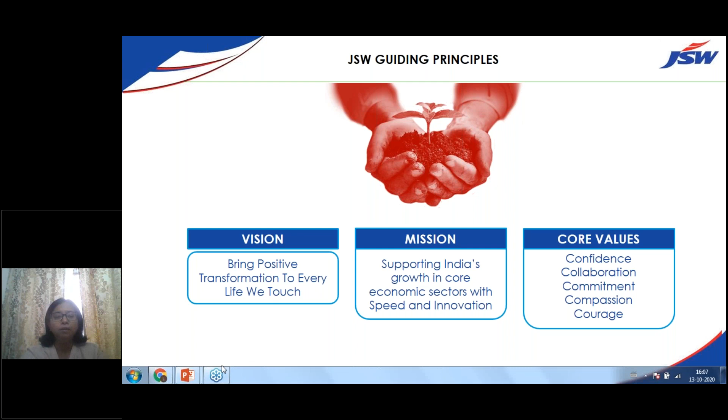I will start with the basic JSW guiding principle - the vision, the mission, and the core values. I would like to draw your attention to bring positive transformation to every life we touch. Mission is supporting India's growth in core economic sectors. Core values are confidence, collaboration, commitment, and the other values you can see here. This is something we very much believe upon - our organization is there to bring the best of products and best of services to people.

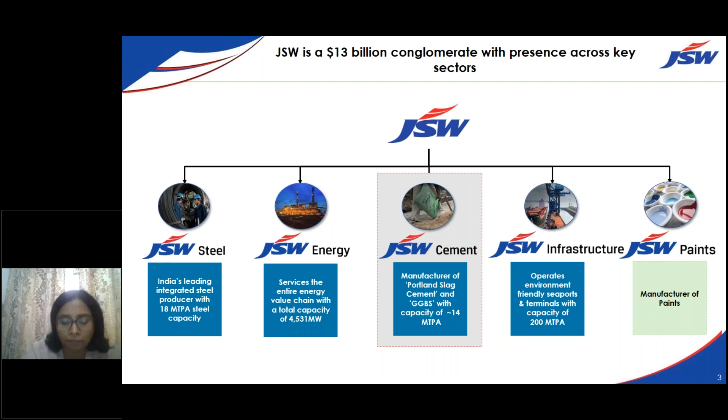JSW organization as a whole is a $13 billion conglomerate with presence across steel - we have 18 million ton capacity, which is going to be further augmented. JSW Energy, we are the third largest player in energy. JSW Cement, we are a young company but with a lot of ambition and plan to grow - 14 million ton is our capacity, and we want to grow up to 30 million ton in the upcoming years. We also have infrastructure like ports and terminals, and JSW Paints factories in Vasind and Vijayanagar.

This is the group's contribution towards India's progress - a lot of education, vocational training courses, and the Olympics - athletes are trained by our organization. If you go to our Vijayanagar Inspire Institute of Sports, you can see boxing, judo, and track training. Sakshi Malik, etc., have been developed under our Inspire Institute of Sport. Metro Rail, developing India - we are doing a lot of work there, laying down new pipelines.

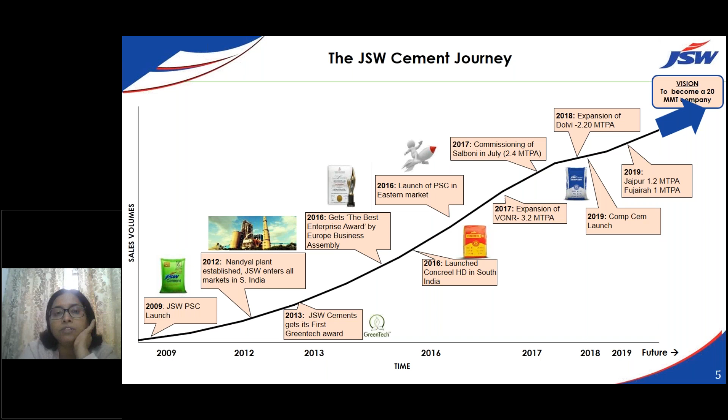The company started in 2009 with the introduction of JSW PSC. Then in 2012, our Nandyal plant was established and we got our first Green Tech Award - the product was green. Then in 2016 we got the Best Business Enterprise Award, and in 2016 we also launched our premium product Concreel HD in South India.

Then we went into PSC cement launching in the eastern part of India. We started Salboni, expanded Vijayanagar and Dolvi, and then went into Jajpur, and progressively set up one unit in Fujairah. Now today we have also acquired a unit of Shiva Cement, where we are going to very shortly put up a clinkerization unit. So this is the journey we are sharing with you.

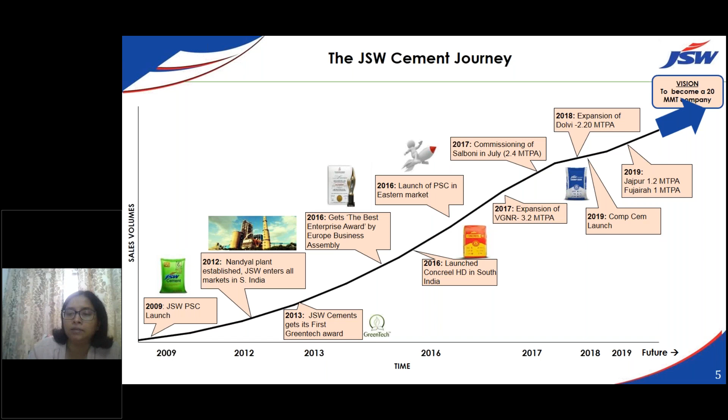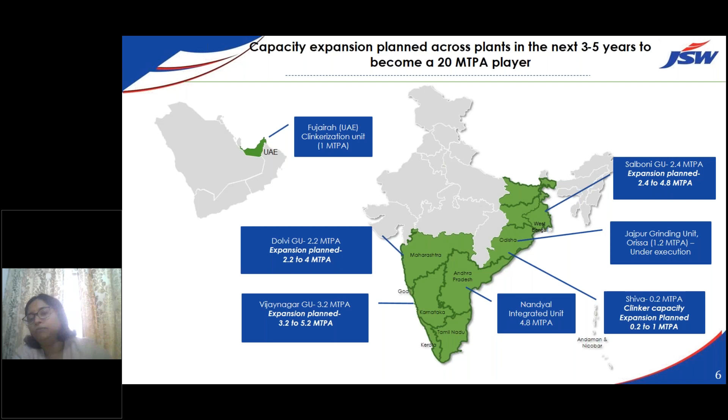With respect to the units, you can see the Dolvi unit - this is 2.2 to 4 million tons, which has been done. Dolvi is under expansion, Vijayanagar is at 3.2 million tons and we want to take it up to 5.2 million tons. Nandyal is an integrated unit of 4.8 million tons, and we have one unit in Jajpur, another in Salboni, and in Fujairah we have put up a clinkerization unit.

So we are going to cover the topic of PSC and GGBS and their role in sustainable construction.

So India's first green cement. We are the first company in India to get our product eco-labeled by CII IGBC. Both our PSC, Portland Slag Cement, and ground granulated blast furnace slag are CII IGBC certified green products, and this is applicable for all our plants.

Other than that, we also have the Environment Product Declaration. This is actually very good for us to tell you, because we competed amongst many top cement manufacturers, and it was found that our carbon dioxide emission percentage was the least in the industry. We have got this EPD declaration for both Portland Slag Cement and GGBS today. I'm very proud to say only a few companies in India have both this Environment Product Declaration, which is in line with ISO and EN standards, for both PSC and GGBS, and CII IGBC certified green product.

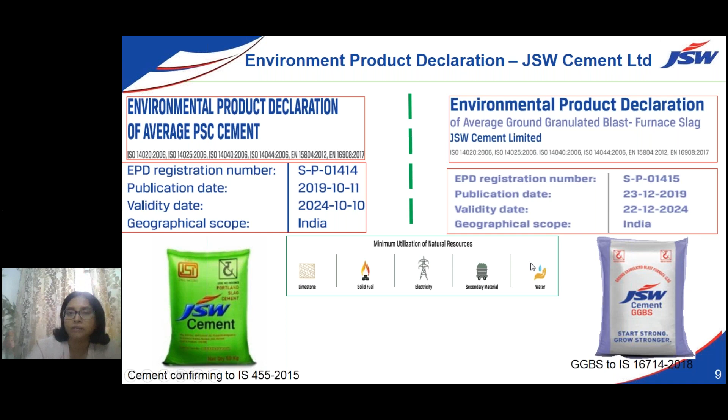So what are the products of JSW Cement which are compliant to CII IGBC Green Pro certification? Portland Slag Cement conforming to IS 455 - this is the mother brand. We also have ground granulated blast furnace slag conforming to IS 16714-2018. We are showing you these two products because these are the main two products, along with some OPC. These are the main baseline products for the institutional and non-trade market sales.

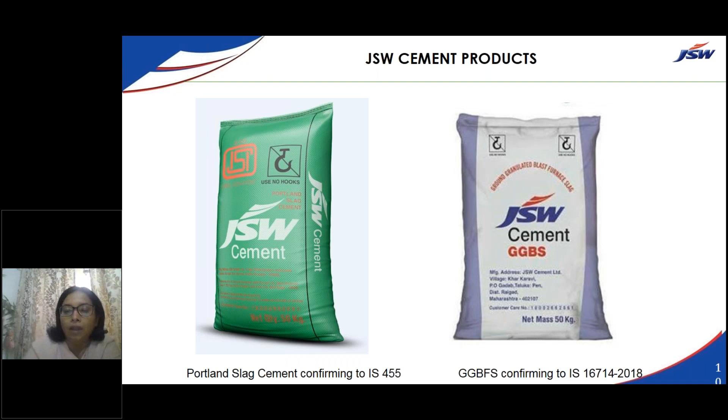If somebody is interested in trade products, we have other product variants like Concreel HD, which is also a Portland Slag Cement, but for people who want immediate quick deshuttering, they can use that product with high strength. We also have composite cement, which is IS 16415 compliant. Along with that, we have raw slag, which can be used as a replacement of sand - 25% to 50% replacement can be done for the coarse and fine aggregate part.

So we will explain what this blast furnace slag is. Blast furnace slag is basically silicates and aluminosilicates of lime, which are developed simultaneously with iron in the blast furnace. The slag which comes out of the blast furnace is rapidly quenched in water, and then it is ground in a vertical roller mill or roller press to a very, very fine powder, which is called GGBS.

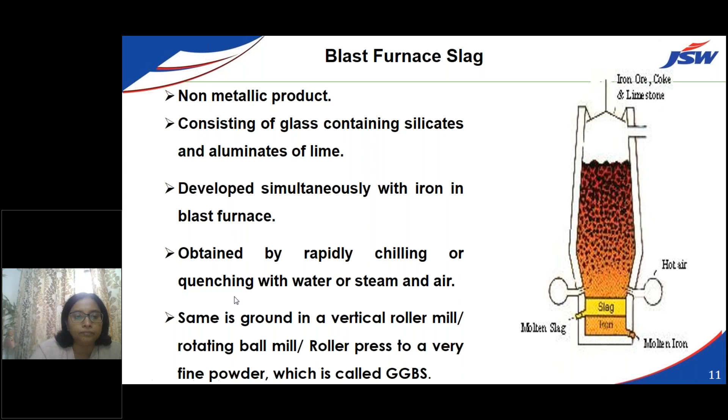So then I will go to the next slide - what is the chemical composition of GGBS? I would like to tell you. The GGBS composition has a unique composition - it has a lot of calcium oxide, which you won't see in other products. If you compare fly ash to GGBS, the calcium oxide content in GGBS goes beyond 30 up to 40%. The glass content is also 97.5%, a very fine glass content.

With the help of this glass content, the product we will be making will be very reactive, and the particles of slag will be so good. It is not only going to give you strength from the calcium oxide - the lime content is at 30 to 40% - but it will also give you the durability you require, and it will also give added benefit to the workability of the mix, etc.

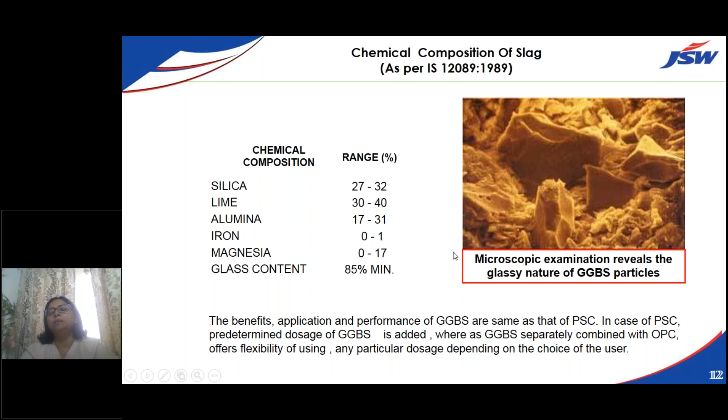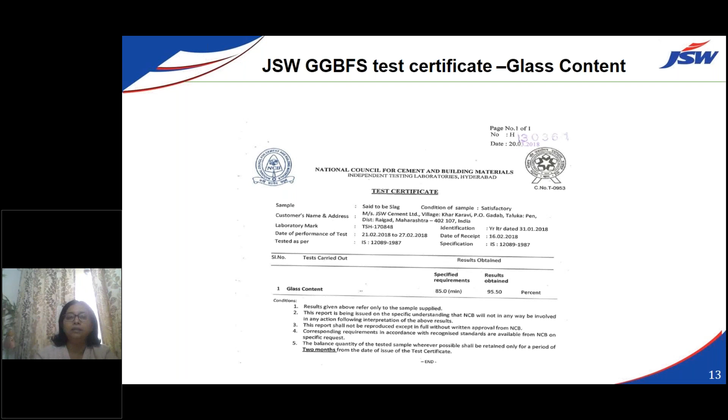So we are showing you some microscopic examination of the glassy nature of GGBS particles. We are enclosing some test certificates - you can see here our glass content goes up to 97%. In many cases, the test certificate done at NCCBM shows 95.5% glass content.

So I was talking about comparison of cement clinker, PSC, GGBS and fly ash. If you see, cement clinker has 62% calcium oxide. In GGBS, it is approximately 40%. But in fly ash, it is very less - approximately 2%. It is very much evident from the mineralogical constitution analysis that the hydraulic properties of slag are equal to that of clinker. So basically, the slag which is ground into GGBS is as good as clinker.

The lime which is used to charge the blast furnace is coming out in the form of slag. So silicon dioxide is present in all of it. It is also present in GGBS, and it is also present in fly ash.

Now, if we see fly ash, what happens in the case of fly ash? Fly ash is collected from different pockets. Different places will have different fly ashes. People are getting very environment conscious, and it is extremely difficult to get good quality fly ash also.

So now the slag which is coming, this is coming from a controlled source, and the manufacturing is also controlled. Hence the slag which is coming is a product of controlled production. The parameters which we'll have will be as good as cement, if not, or cementitious product, if not equally better.

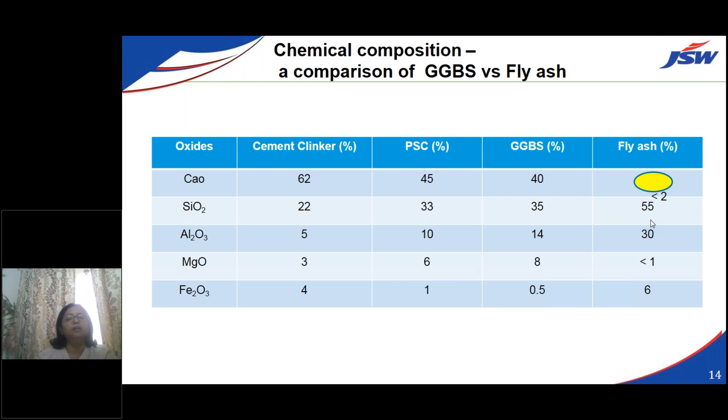That's the reason if you see the IS codes are permitting replacement of slag up to 70%. If you see EN, British codes or European codes, the slag goes up to 90% also, in places where there is a lot of marine environment, cold weather is also there.

But however, even in EN and also in IS, the slag replacement percentage, though it is very, very much on the higher side, the fly ash can go up to maximum 35% because of the different sources fly ash is coming from. We don't know whether it is dry, and it is just mixed like that. Very few manufacturers are processing fly ash. In fact, nobody is processing and adding fly ash.

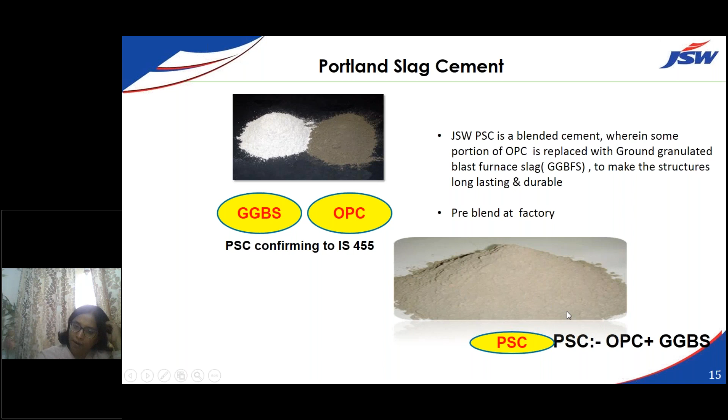So this is the difference. Wanted to show you the GGBS, the powder which is there, the whitish colored powder which is mixed with OPC to make an inter blend of Portland slag cement, which is OPC plus GGBS. It is pre-blended at the factory.

So we are showing you the slag powder, which is conforming to IS 16714. This is used as a partial replacement to OPC cement in concrete production in RMC batching plants and site batching plants. So this is something which we have already shared, I will not repeat this.

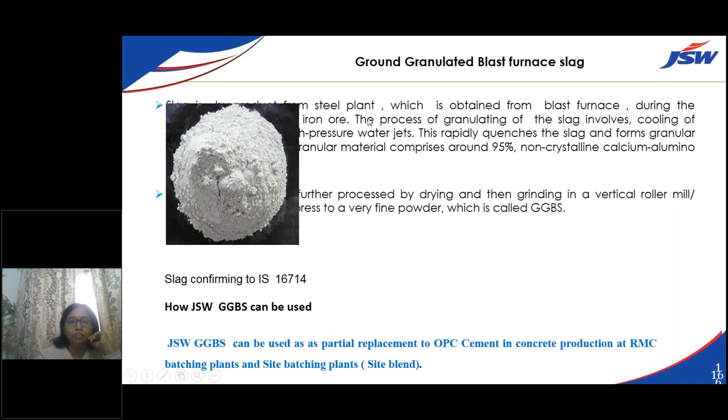So what are the hydration mechanisms which are happening? So when OPC is mixed with water, there is a calcium silicate hydrate gel which is formed, and calcium hydroxide is also formed, which is a byproduct.

So this calcium hydroxide, normally what it does, it goes and occupies the space which is very near to the aggregates, because those spaces are spaces where there are a lot of pores and voids. The water which is there inside slowly gets evaporated, and the water interacts with the cement, and the calcium hydroxide goes and takes those places.

So this calcium hydroxide, supposing a concrete which is having a lot of calcium hydroxide, you'll see white particles have come and the lime has leached out. What happens? Where the lime has leached out, pores and voids will be formed, and through those pores and voids, the particles of the environmental agents are going to go inside. They are going to sit on the reinforcement rod or corrode the reinforcement rod, and there will be a lot of complication in the concrete structure.

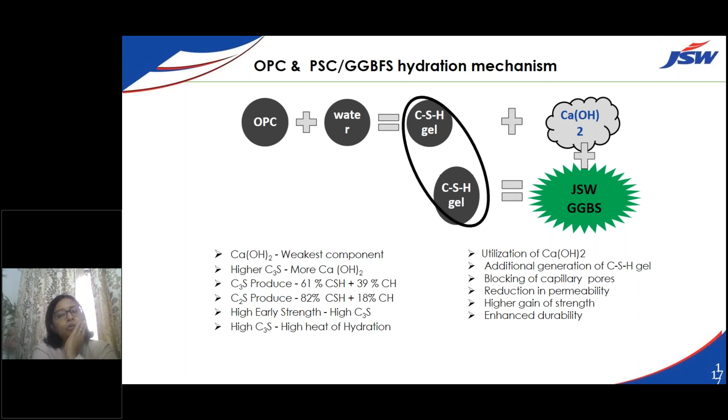It will be distressed. So in order to finish this calcium hydroxide, what has happened? We are adding slag. So slag reacts with calcium hydroxide to form another layer of calcium silicate hydrate gel, or tobermorite gel. This gel is very good, and it is going to utilize all the calcium hydroxide in the system. It blocks all the capillary pores, it reduces permeability. With reduction of permeability, there is also a high gain of strength, and the durability of the structure obviously increases.

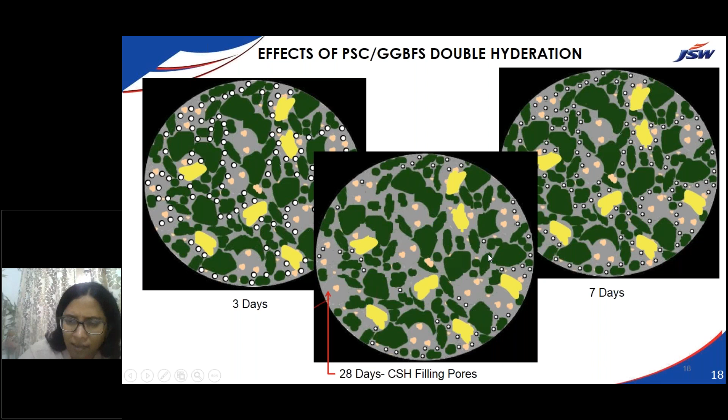So we will like to just show you the pores and gel. When you are using at 28 days, you can see here the pores and gel - in 3 days they were very big, but with the hydration products of the slag coming in, the pores and gels become smaller, and the durability of the structure increases while the permeability of the structure reduces.

We will talk about sustainable development. Sustainable development is concrete compressive strength. So now people will be telling us about the concrete compressive strength. So if we are comparing a PSC cement or an OPC cement, if you can see the strength here, or OPC GGBS 40%, OPC fly ash, you can see the long-term strength. The short-term strength will be almost similar, that's 28-day strength.

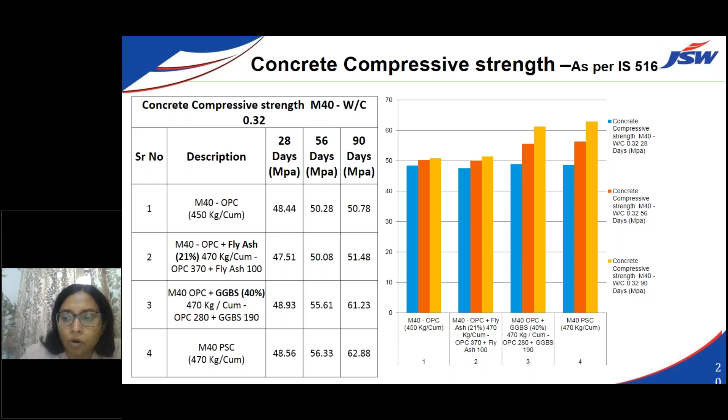The best part about slag is that the long-term strength of slag products gives you higher compressive strength compared to fly ash based or OPC based concrete. This is the compressive strength.

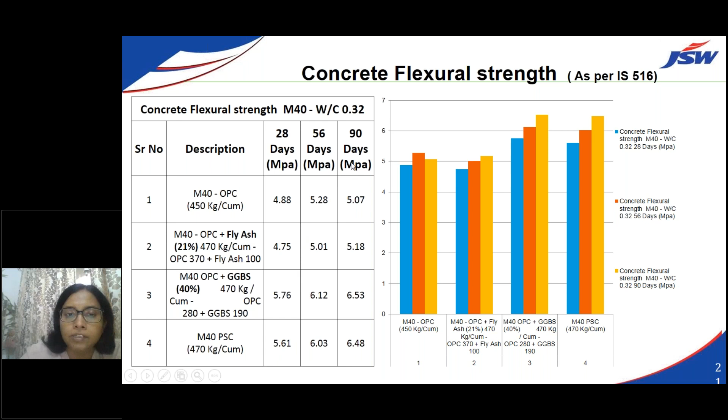Now we move on to flexural strength. Here you can see the flexural strength of M40 OPC and M40 PSC. The flexural strength is also improved here, and it is in line with OPC, if not better.

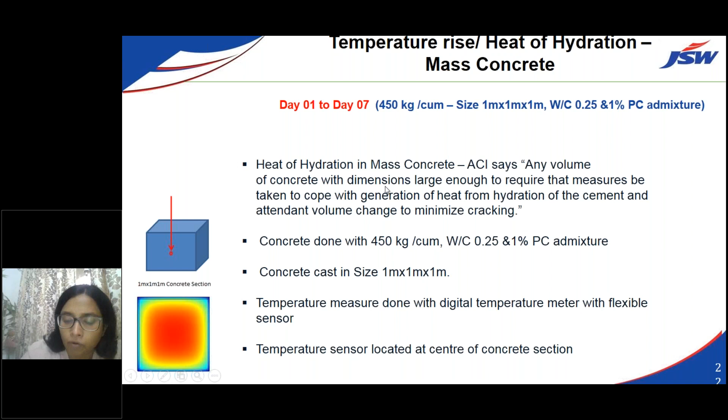The heat of hydration - I'll briefly cover the principles in general and share the detailed presentation separately. The heat of hydration of slag products is very good, comparatively much less compared to products made with purely OPC. So we have done some heat of hydration tests at NCCBM.

Cement has given a heat of hydration of 853 kilojoules per kg, whereas fly ash gives a heat of hydration of 663 kilojoules per kg. Slag products give a heat of hydration of 228 kilojoules per kg with 50% replacement.

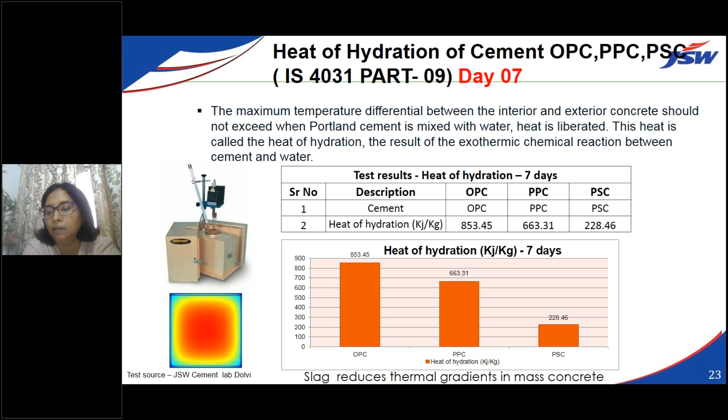So you can see the thermal gradients of the mass concrete are reduced. The temperature of the concrete goes down, and there will be very little cracking in the concrete structure. Again, going back to the same point, the durability of the structure will be improved. The exothermic chemical reaction, when water is added to cement, releases a lot of heat - this can be controlled with slag products.

This is a very important parameter, a new one that has come in and is very much prevalent. There is a trans-harbor link being built on the Arabian Sea, about 30 kilometers long, going inside the sea and connecting different parts of Mumbai. We are showing you a photo of this trans-harbor link.

The contractors are L&T and Tata Projects, and they have done so many trials - each must have done more than 100 trials, with OPC, OPC fly ash, OPC slag, OPC GGBS, and OPC GGBS microsilica. After doing all of this, only the products of slag could meet requirements.

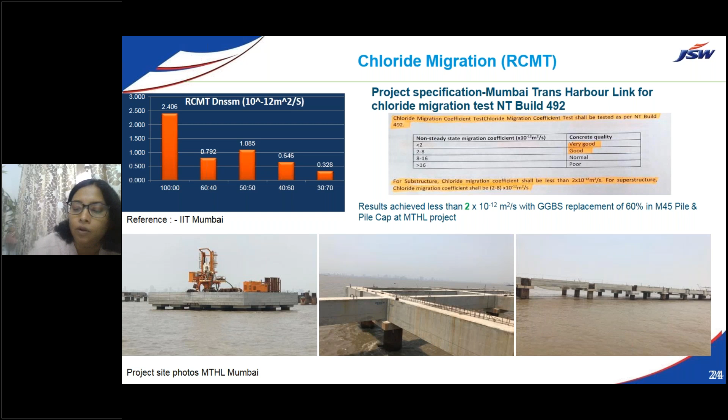The chloride migration coefficient test, as per NT Build 492, which should be less than 2, could only be achieved with GGBS. In this extremely aggressive environment, no other product could take care of this.

We move on to the rapid chloride permeability test. This is a very easy test, simple to do in laboratories. If we look at various replacement levels of GGBS - 0%, 25%, 40%, 50% - we see that normally with 50% replacement of GGBS, the rapid chloride penetration charges passed are very, very low, approximately 500 to 600.

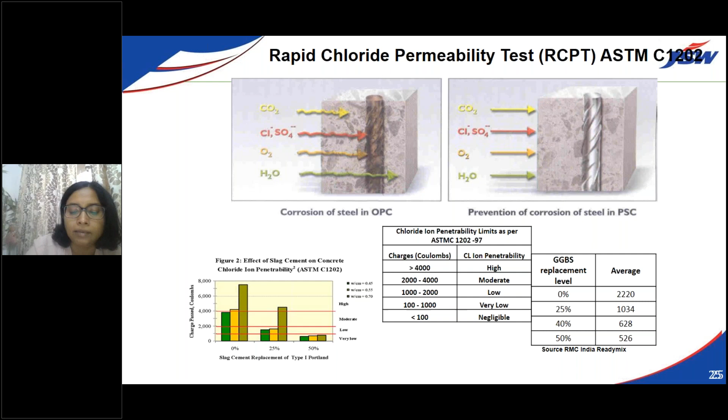If there is only OPC in the system, you can see it goes beyond 2000, sometimes up to 3000 to 4000. So the more slag we add, the readings become very low, and chloride ion penetrability reduces. The structure becomes such that external agents like chloride, sulfate, nitrate, etc. cannot infuse inside the concrete, and the structure behaves in an impermeable and strong manner.

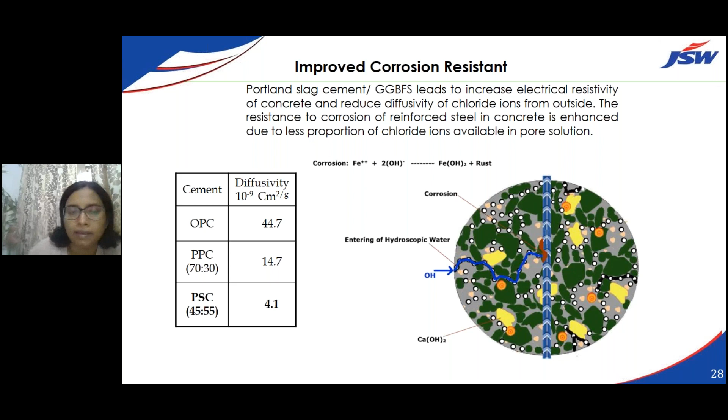Basically, there are a lot of pores, voids, and channels in the system, and when using OPC there is a linkage happening in this. When PPC cement is used, the diffusivity reduces to 14.7. However, there is a drastic drop in diffusivity if Portland slag cement is used, with a replacement level of 55% - the diffusivity level is 4.1 times 10 to the power minus 9 centimeters square per gram.

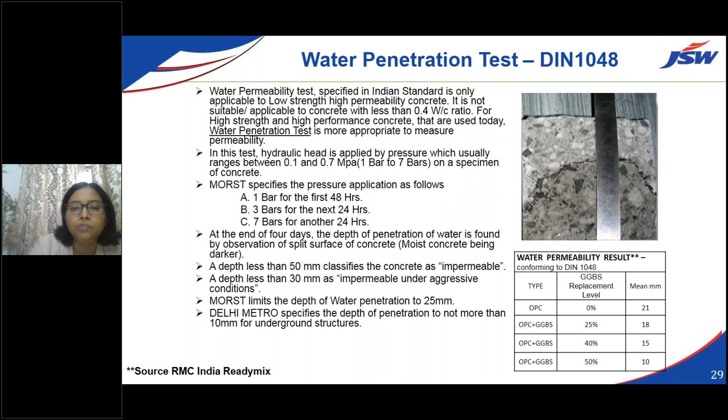A very important test - water penetration test or water permeability test. It should be less than 10. We are basically going into the main concept here: 50% OPC with GGBS plus OPC will give you a mean water penetration depth of less than 10, which is very good, as these are the conditions that metro authorities normally require for construction.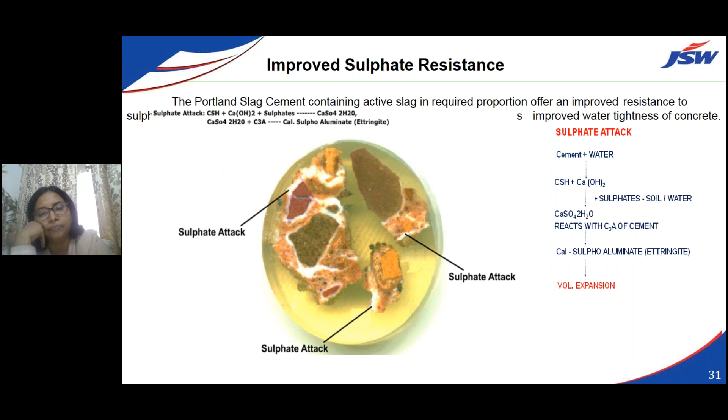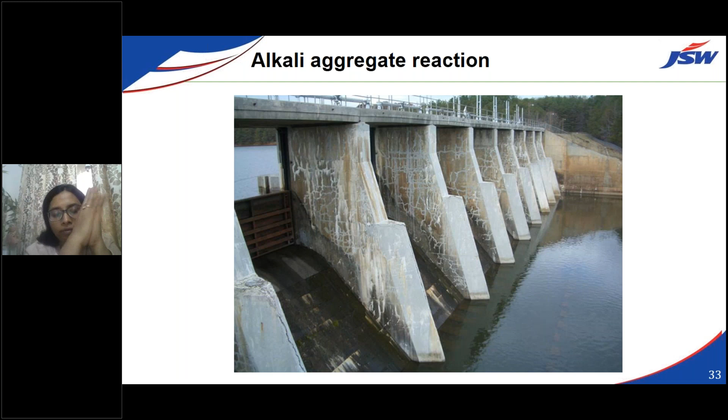Along with that, slag products take care of sulfate attack, improved sulfate resistance, and alkali aggregate attack. I'm not going into detail because these are topics in themselves, but the slag products have the ability to take care of the evil effects of sulfate attack and alkali aggregate reaction. You can refer to any textbook, P.K. Mehta and Monteiro, or Neville, but you can see the photos we have shown here.

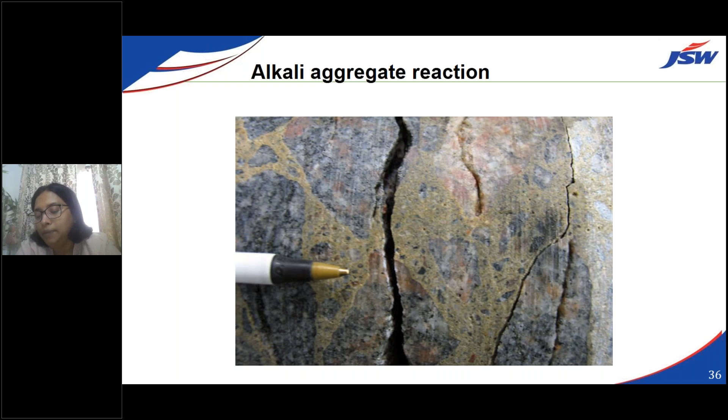Similarly, with sulfate, if sulfate soils enter the foundation or the concrete of a building by seepage or any other means, the products formed are going to be harmful, and we have to take care of this. That's the reason slag cement, GGBS and PSC based products, are preferred, as they reduce this reaction.

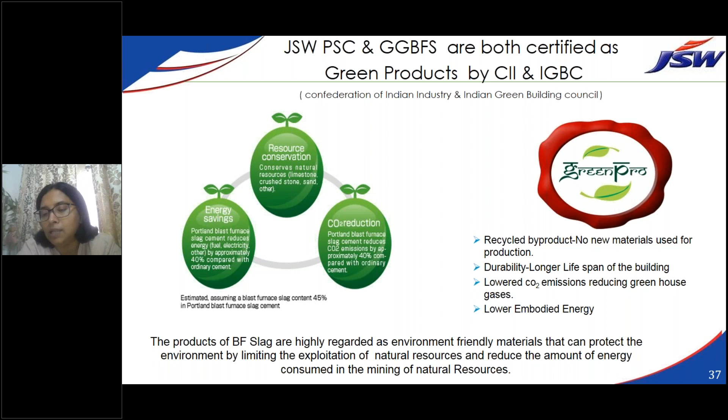On what basis has the green product certification been given? Resource conservation, because we are utilizing the industrial byproduct of calcium oxide, which conserves natural resources like limestone, crushed stone, and sand. Carbon dioxide reduction is there because we are not making as much clinker; we are utilizing the byproduct from steel manufacturing in our process. And energy saving, because we are using alternate energy such as fuel and electricity. So we are saving resources, saving the mother earth, which is why this is a very green product.

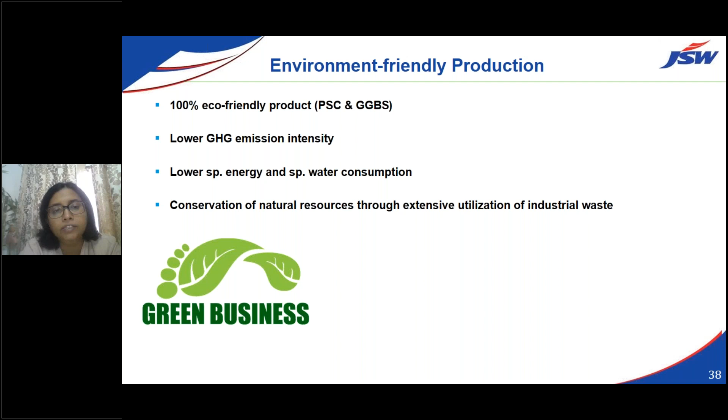So eco-friendly product, lower greenhouse gas emission, lower specific energy, lower specific water consumption, and conservation of natural resources are the key points we have.

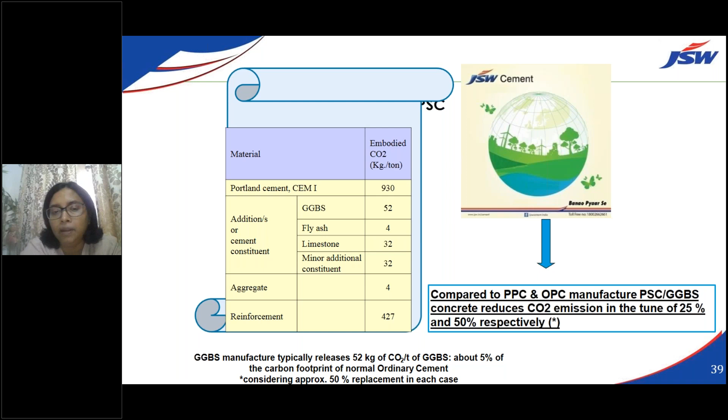Compared to PPC and OPC manufacturing, PSC and GGBS concrete reduces CO2 emission to the tune of 25% and 50% respectively. So if somebody is using PSC, they will have savings of 25%, and GGBS 25 to 50%, depending on the percentage of slag being added.

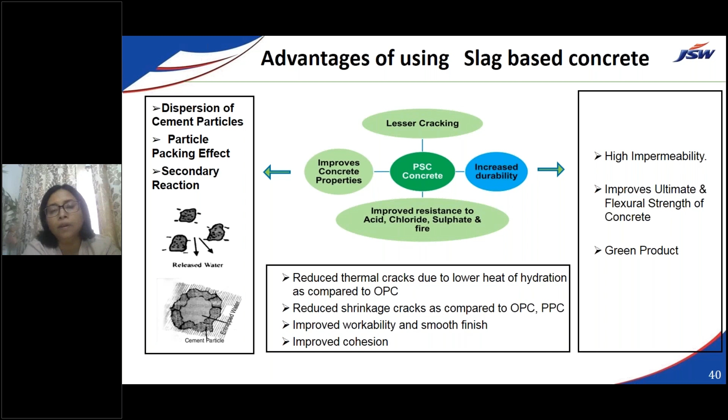Advantages of slag-based products we have already told you, I will just brief here: reduced thermal crack, reduced shrinkage, better workability, improved cohesion, less cracking, increased durability, improved resistance, and improvement of concrete properties. So Portland slag cement and GGBS concrete can be used in piles and pile foundations, and in any structure. Especially GGBS is meant for concrete work, but PSC as a cement can be used from pile foundation to plastering.

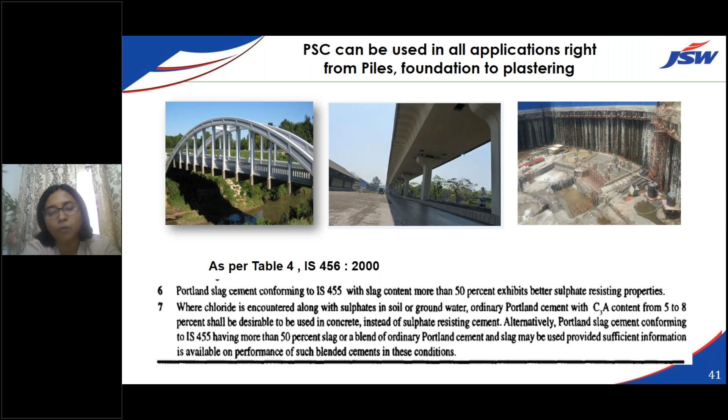Our PSC cement and GGBS are extensively used in Kolkata Metro work. So you can be rest assured that the products you are getting are not lesser than world standard, but in fact equal to any world-class manufacturing standard product.

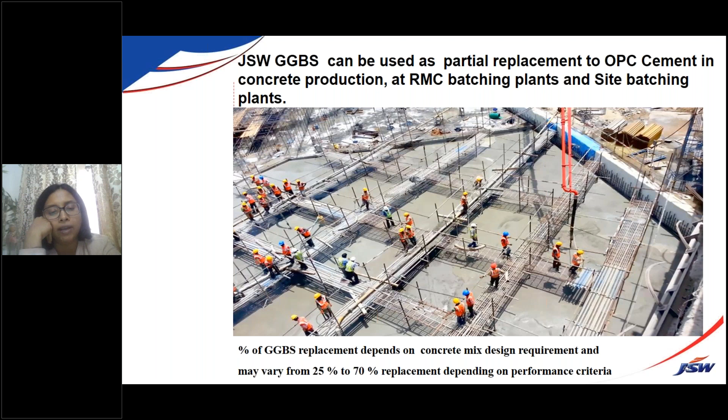You can see here the percentage of replacement depends on the concrete mix design; replacement can vary 25 to 70% when GGBS is used, depending on the performance criteria.

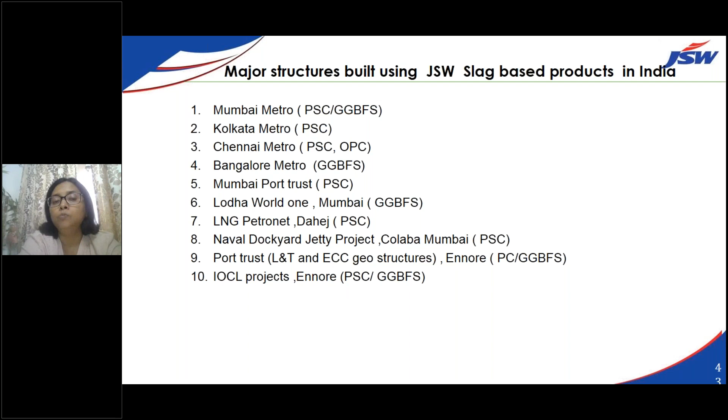Structures where we have sent our product: Mumbai Metro, Kolkata Metro, Chennai Metro, Bangalore Metro, Mumbai Port Trust, Lodha World One, the tallest building of Mumbai, which has slag products inside it. So you can think about it. LNG Petronet Dahej, Naval Dockyard, Port Trust Ennore, and a lot of projects in Port Trust Mumbai have used our JSW products, IOCL.

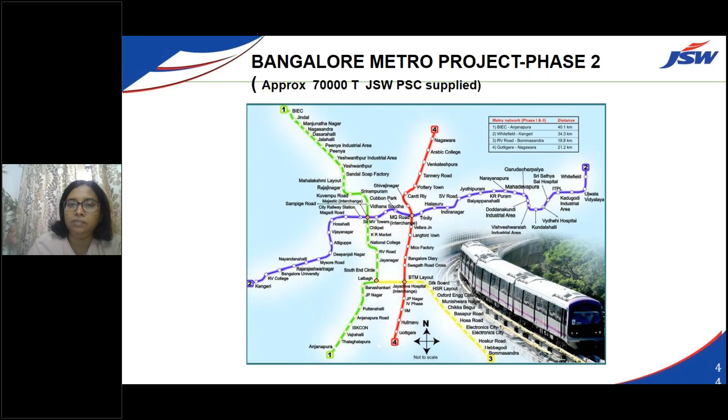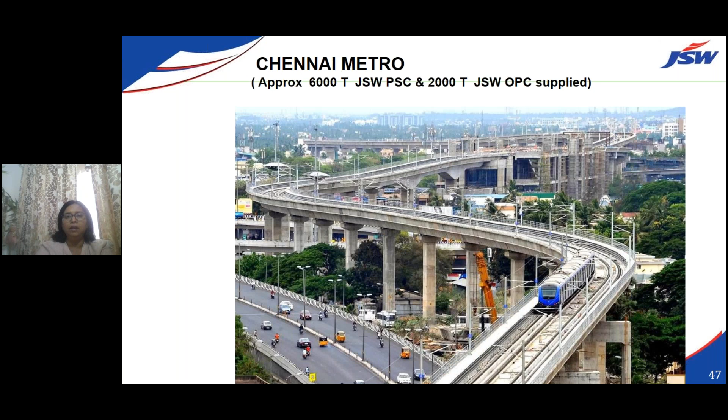70,000 tons of GGBS has been supplied. It is wrongly mentioned here, it is GGBS which has been supplied. Mumbai Metro: 1 lakh ton PSC and 20,000 ton GGBS supplied. Kolkata Metro is fully made with slag cement. Chennai Metro has both PSC and OPC supplied, and now GGBS has also started to go there. Mumbai Port Trust, Mazgaon, is again like Trans-Harbour Link.

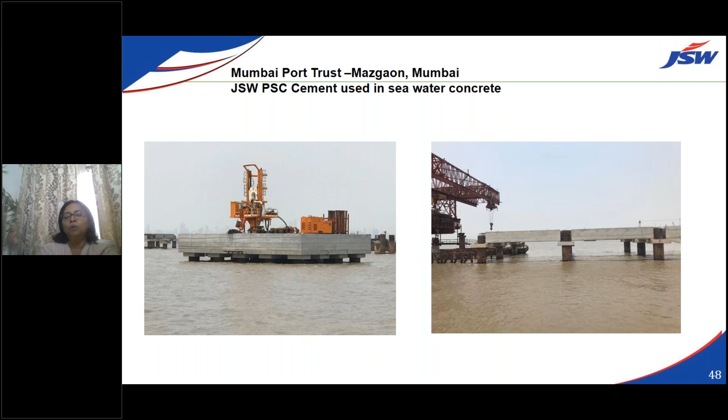It's a fantastic structure, M50 and M45 grade of concrete. You can see the structures inside the sea - absolute pristine structures have been made, fantastic constructions. Only JSW products could qualify the aggressive criteria.

Similar here in Ennore Port Trust - so these projects are a matter of pride and joy. Worli Bandra sewage outlet pipeline.

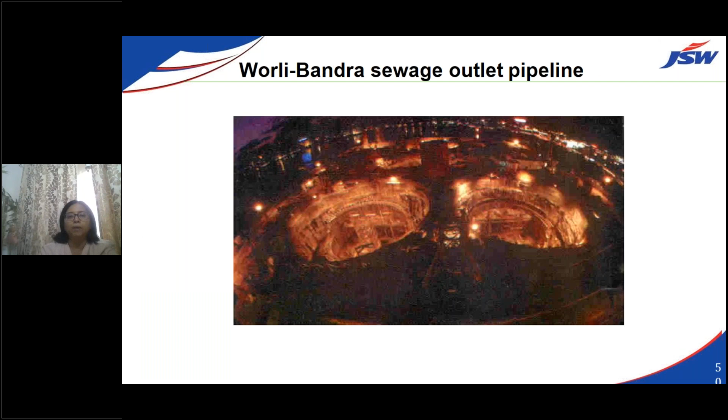We also want to show you some of the structures worldwide where slag products have been used - Bhakra Dam, Akashi Kaikyo bridge in Japan, Bandra Worli Sea Link concrete foundations. They had brought slag from Visakhapatnam, not from JSW.

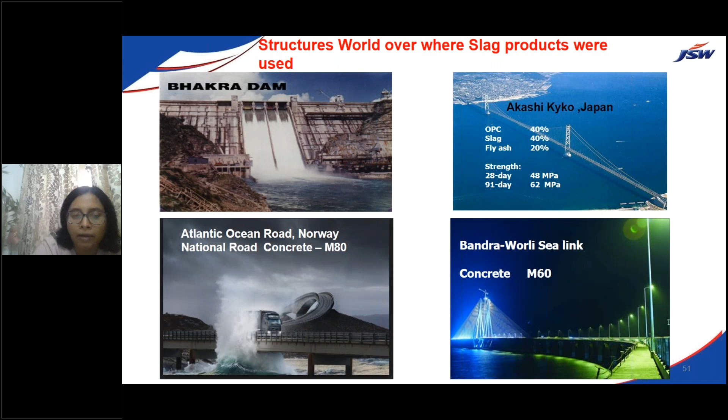Atlantic Ocean Road, Norway, M80, the replacement goes from 80% and above. You can see the grades of concrete here. Some test certificates are there, but I don't want to get into the detail of the test certificates.

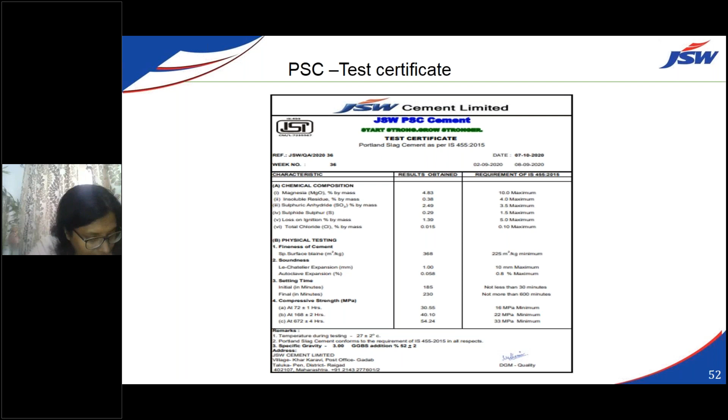Asking the question: when we compare PPC based concrete compared to OPC, what is the basis that...

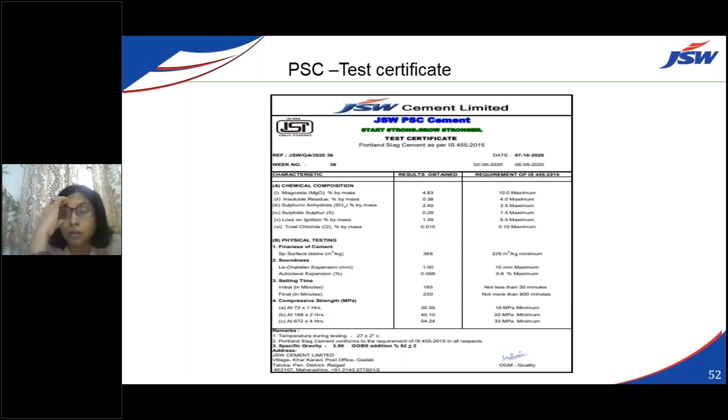Madam, are you able to hear? I could not hear you, there was a lot of noise. Could you hear, madam? No. Can I repeat, madam? Can I repeat again?

Sorry, I'm comparing the PSC and PPC based concrete compared to OPC based concrete, what is the basis considered? Same grade. Okay, okay.

What will we do with the questions to you, madam? Please email the questions to me because you are breaking and I'm not able to hear anything, there's a lot of sound coming. Okay, we'll send you the questions, madam. Okay, madam.